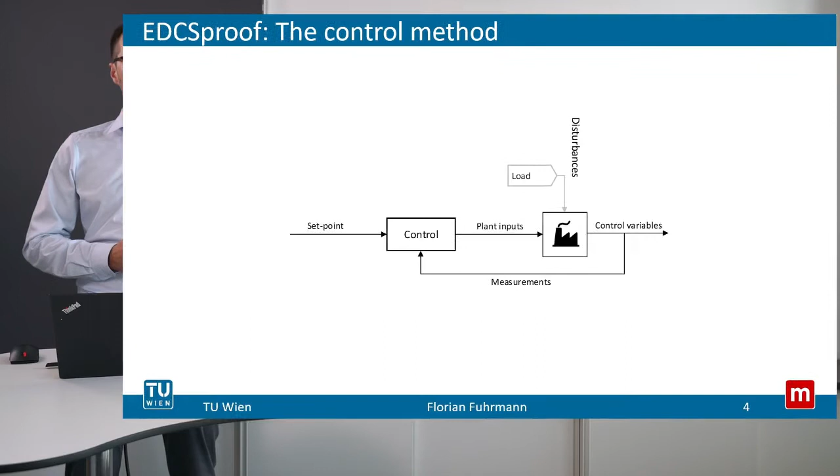These partly conflicting goals and the new power market make the supply of energy for baking bread a complex undertaking. Luckily, digitalization enables control methods which meet those challenges. Let's look at these challenges from the view of a control engineer.

The transition of the energy system leads to two new disturbances, the weather and the energy price. The new power market brings new market constraints to the system, for example, a maximum energy consumption at a certain time.

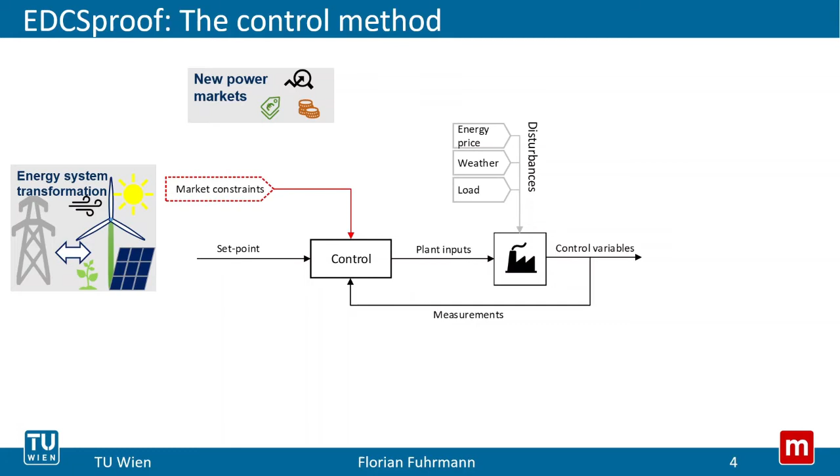The product quality requirements bring new process constraints to the system, and the competing goals change the single set point to multiple objectives. The CO2 production has to be weighed against the wear of a CHP, or the energy efficiency has to be balanced with energy prices. The correct weighing of these different objectives is a complex decision and demands interactions of the operator with the system as a new input.

Luckily, digitalization also provides some methods where the plant can benefit from these new challenges. Predictions of the weather and the electricity price allow a predictive and flexible operation of the energy supply system. New industrial computers enable mathematical optimization for real-time control. Therefore, the objectives can be formulated as an objective function, and also the constraints can be brought into the optimization problem.

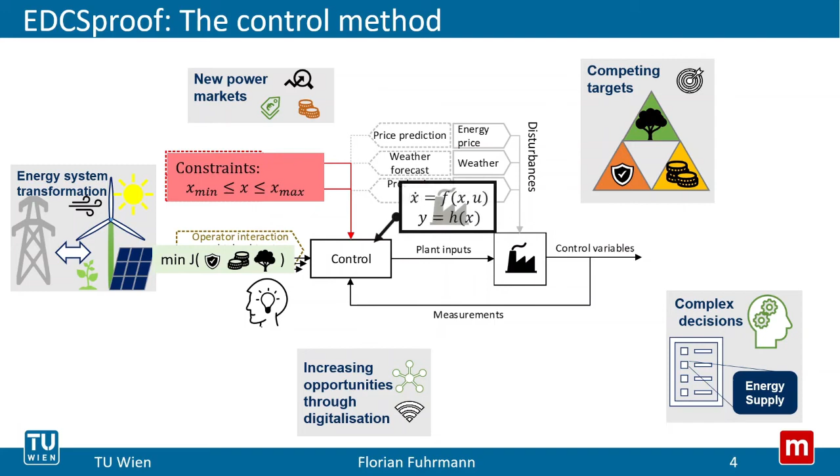The last method which is needed for a holistic and optimal control of the energy supply system is the model, a mathematical description of the plant. With the model, the trajectory of control variables can be calculated with given plant inputs. Together, these components, the predictions, the objective function, the constraints, and the model, enable the so-called model predictive control. Model predictive control calculates an optimal trajectory for all plant inputs and outputs by solving the optimization problem in each time step. This is the essence of model predictive control.

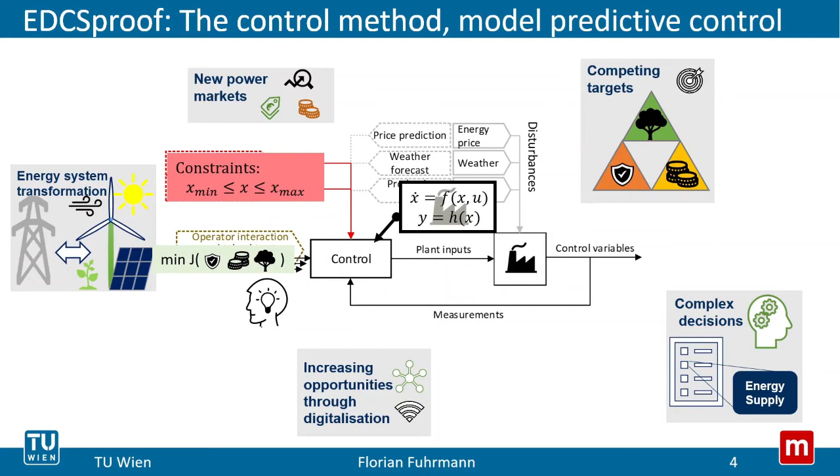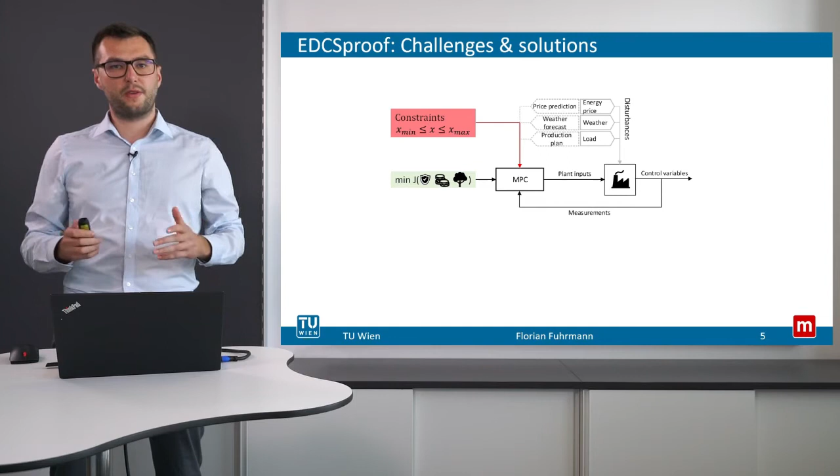We have seen that model predictive control meets all the challenges of controlling an energy supply system. So why is this method rarely applied in industry? There are some challenges remaining, hindering the implementation of model predictive control. During the project EDCSproof, solutions were developed.

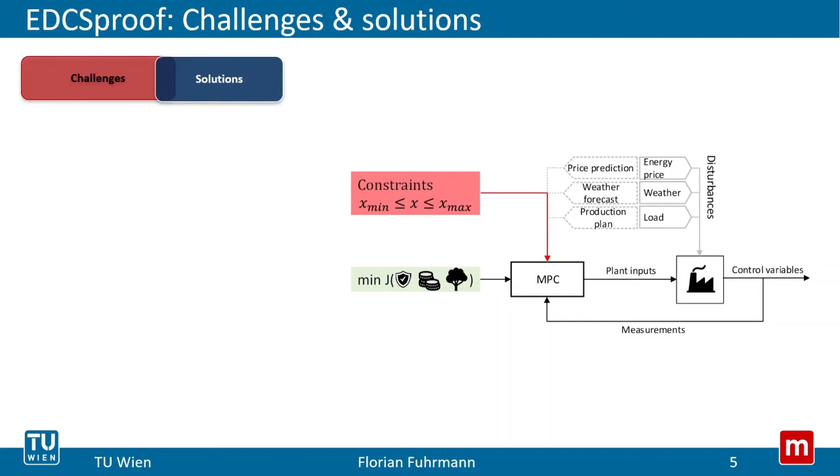The first challenge is the modeling of the energy supply system. It is a very time-intensive and resource-intensive task which has to be repeated for each new plant and at each significant change of the plant. Therefore, a modular implementation method was developed and validated during the project EDCSproof. It allows an effective and purposeful implementation of the MPC.

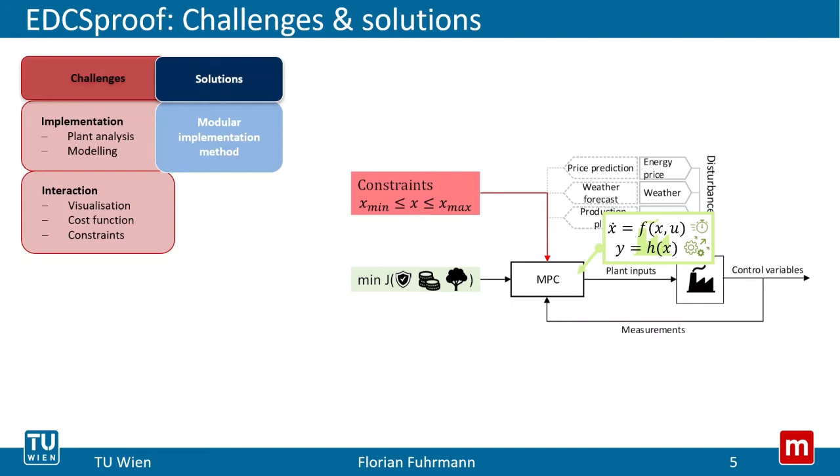The second challenge is the interaction of the operator with the control system. A human-machine interface was developed which visualizes the key performance indicators for the operator and transforms interactions of the operator with the system into changes of the objective function or constraints the system can handle.

The third challenge is the intense computation effort of real-time optimization of the energy supply system. Even though computation performance has increased in the last years, the online optimal control of energy supply systems is still a challenging task. This challenge is intensified by the long prediction horizon which is needed for the optimal control of the energy supply system. Therefore, a two-layer optimization was introduced, where the higher layer considers only the long-term effects, while the lower layer considers the short-term effects.

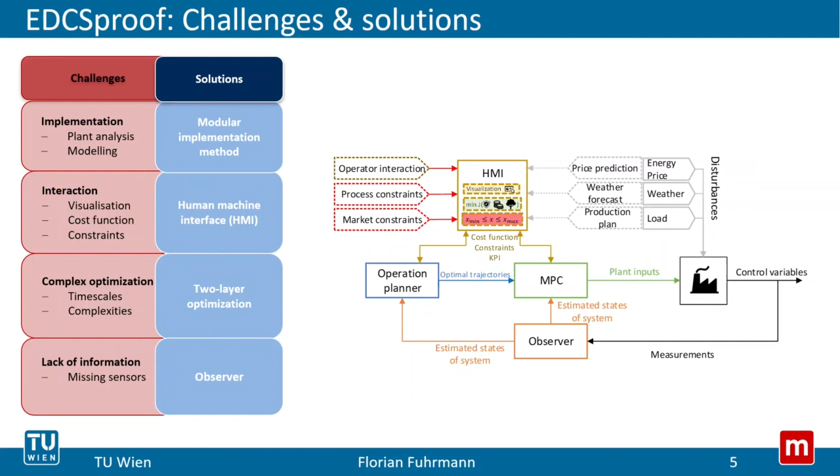The last challenge, but definitely not least important, is the information which is needed for the optimal control of energy supply systems. Often, sensors are missing in industry plants or important states cannot directly be measured. Therefore, an observer was implemented into the control system. Together, all these solutions were called Energy Demand Control System by the project team. Short, EDCS.

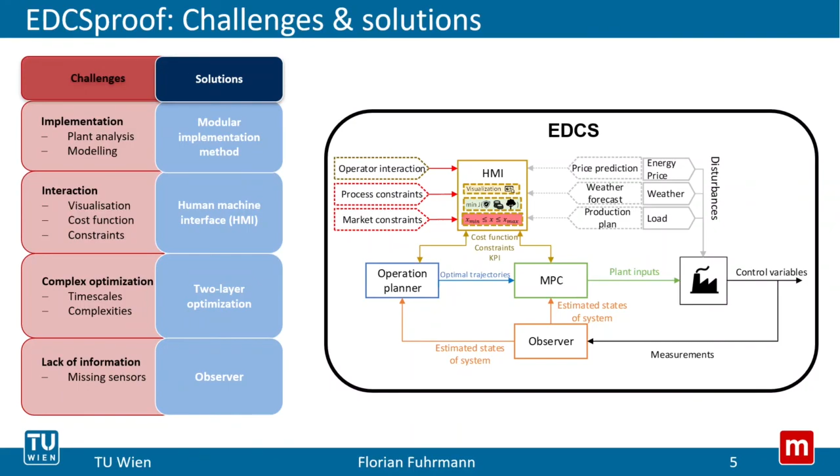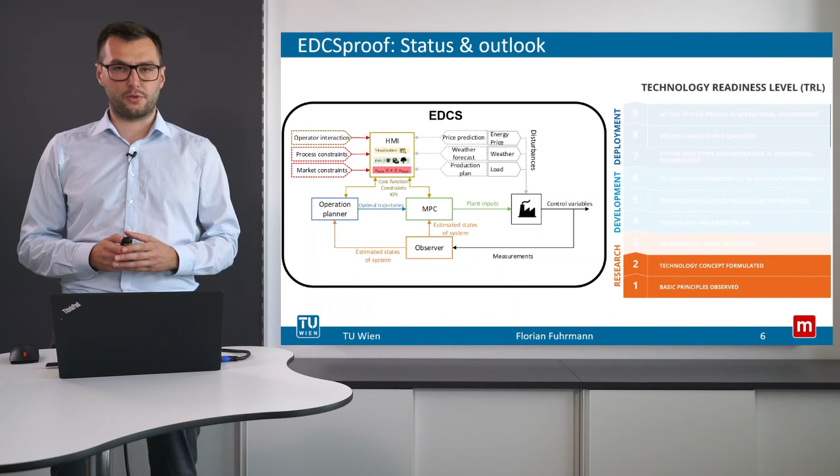Let's recap the work that was done so far in the project EDCSproof. The EDCS was developed from the basic principles of model predictive control. It was tested thoroughly in simulation studies, and the performance was validated in laboratory environment. Therefore, EDCSproof is a successful project as it brought the EDCS from Technology Readiness Level 2 to Technology Readiness Level 4.

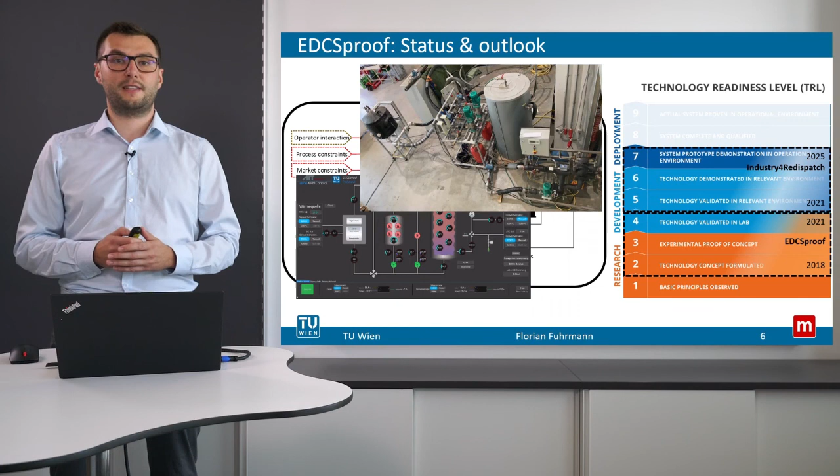And we are very happy that the journey doesn't stop here. The follow-up project, Industry4Redispatch, already started. This flagship project has the main goal to implement the EDCS in 3 industrial plants and thereby reach Technology Readiness Level 7 by 2025.